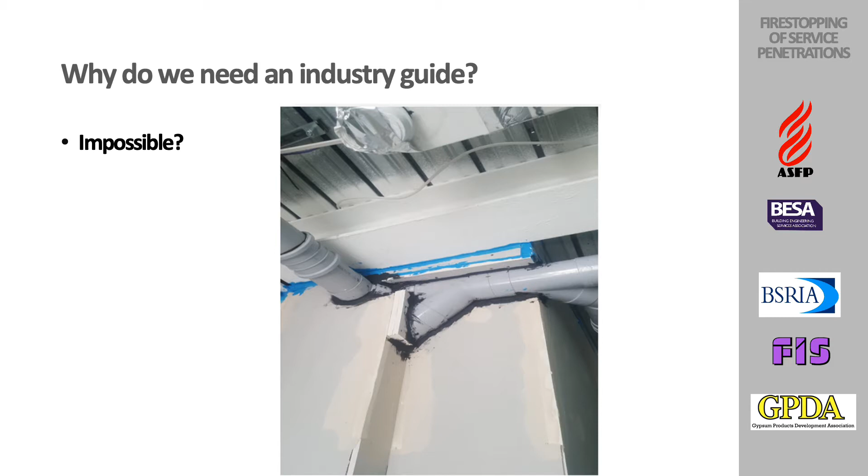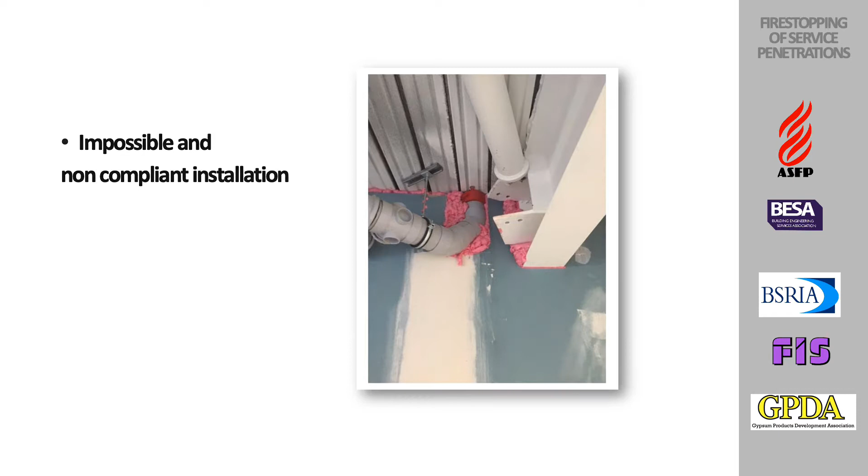I'm going to talk to you about why we produced this guide, how we developed it, and I'm going to talk you through some of the key points from the guide. Why? Well, there are many examples of why we needed a guide. These slides clearly show bad installation, awful design, and no thought that's gone into the fire stopping of this. This is obviously wrong, but not all non-compliant fire stopping looks non-compliant.

Breaches in compartmentation contributed to the spread of smoke, fumes and the fire at Lakanal House, where 6 people lost their lives. The fire at Grenfell Tower and the subsequent report from Dame Judith Hackitt has made the industry look again at what it does. Dame Judith has seen this guide and said that the guide was an example of collaborative working. We think it's a good example of not waiting to be told what to do.

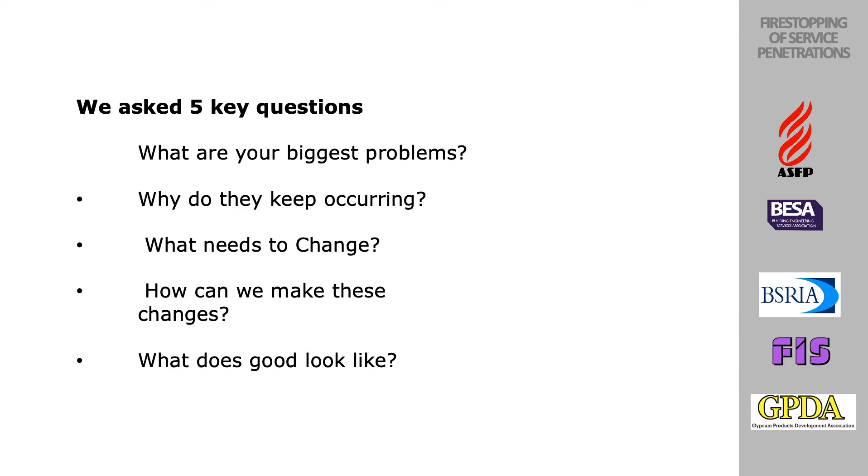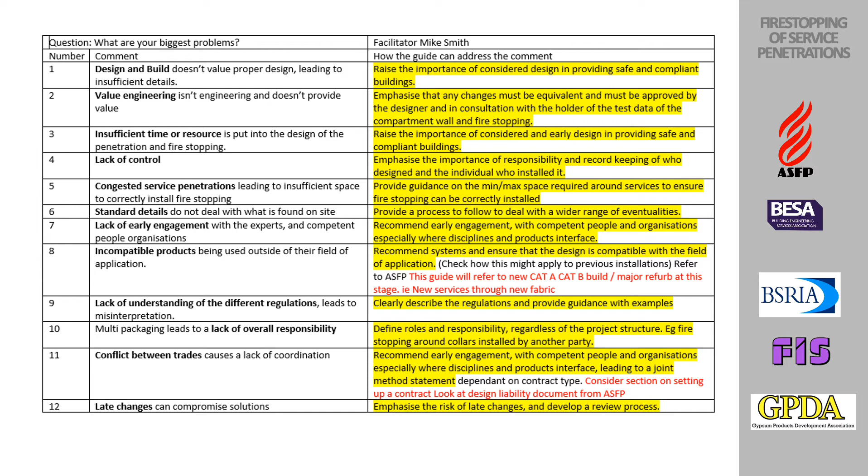We started by holding a workshop in November 2018. And we asked 5 key questions. What are your biggest problems? Why do they keep occurring? What needs to change? How can we make these changes? What does good look like? We summarized all of the answers that we got to these questions together and then looked at how we could answer those questions in a structured way in the guide itself. When we produced the guide and the drafts, each one went through a series of peer reviews to ensure there was rigor in the content.

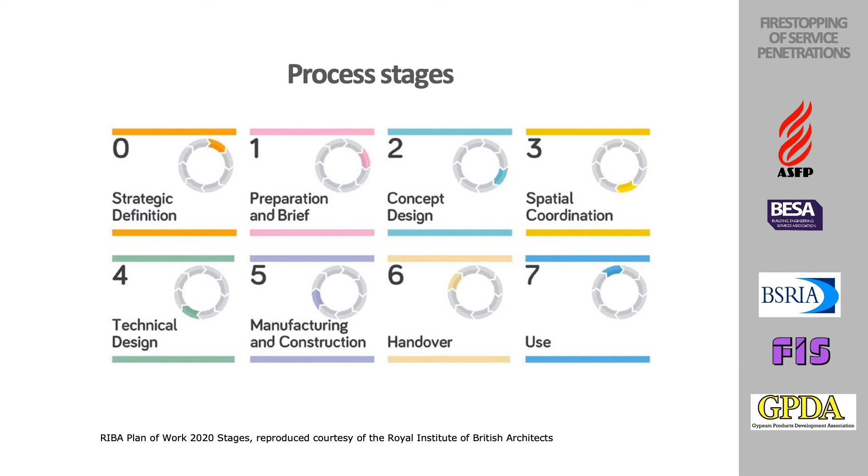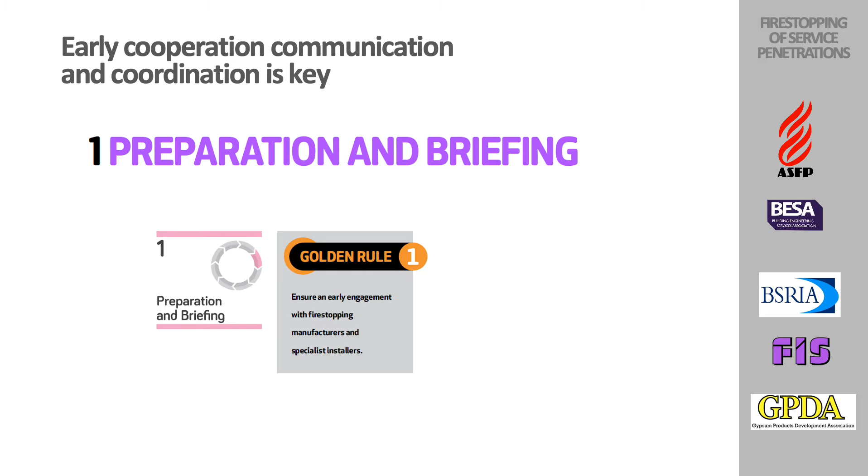We developed 9 golden rules, and I'll run through these as I go through the presentation. And importantly, where we could, we aligned them to the RIBA plan of work. So Golden Rule 1 is ensure an early engagement with fire stopping manufacturers and specialist installers, i.e. don't wait until there's a service opening that requires fire stopping to think about the fire stopping. Defining responsibility early is crucial. Collaboration is key to success.

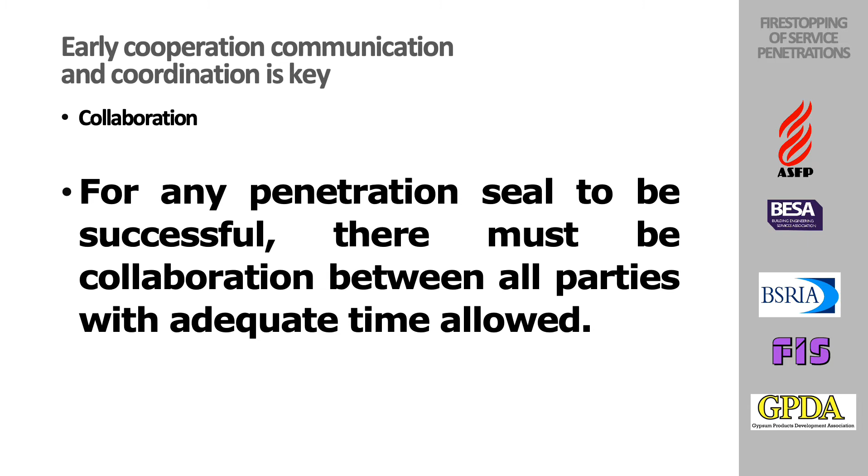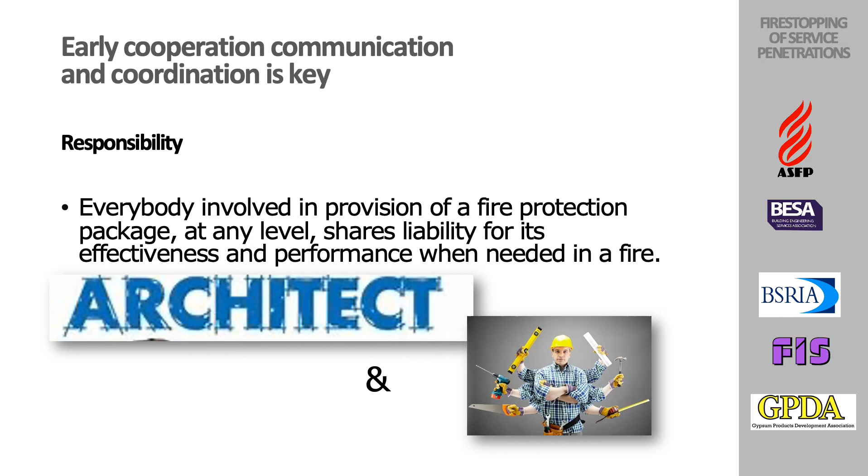Responsibility for the design sits with the designers, but can inadvertently be with the contractor without knowing that they've taken it on by putting forward alternatives without getting approval from the designer. Golden Rule 2, review the fire strategy documents and fire strategy plans in conjunction with the M&E specifications. Golden Rule 3, identify all of the service types passing through the compartment floor or wall, including any insulation products, and establish the space required to install the fire stopping around the services.

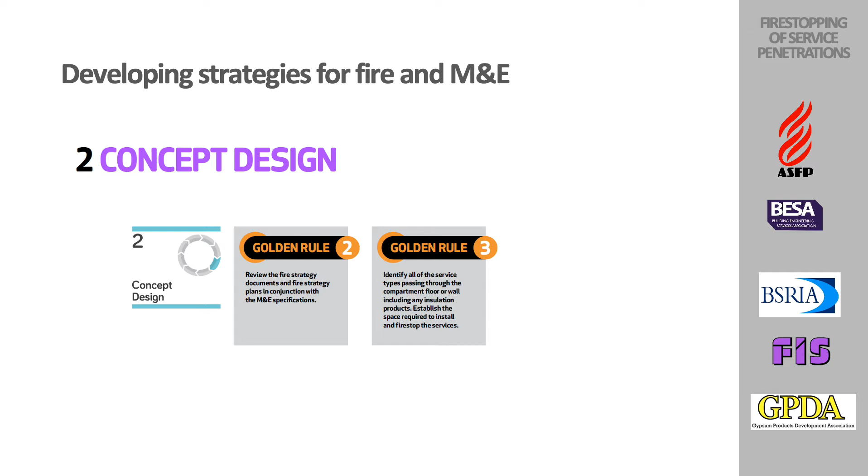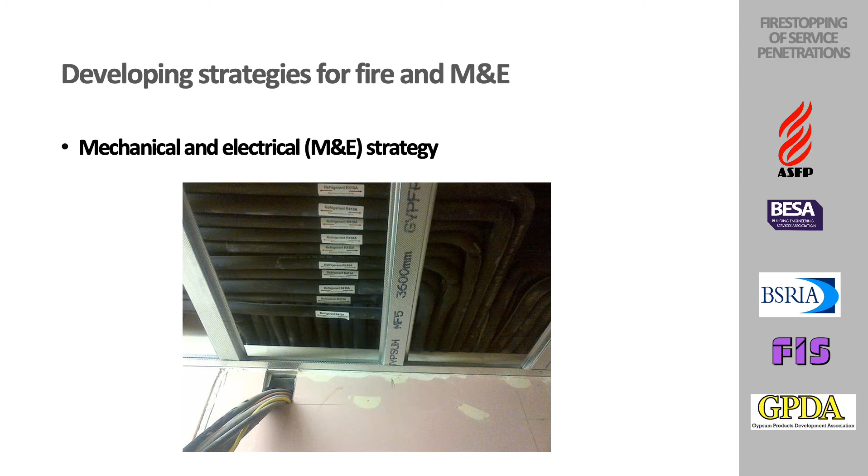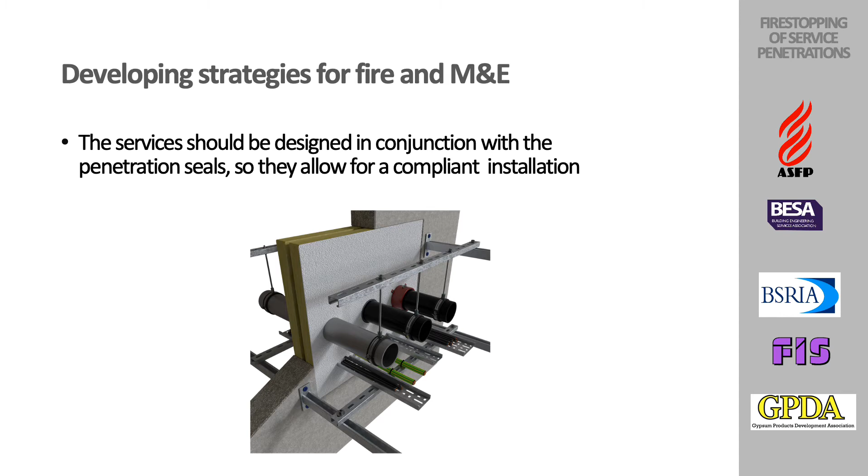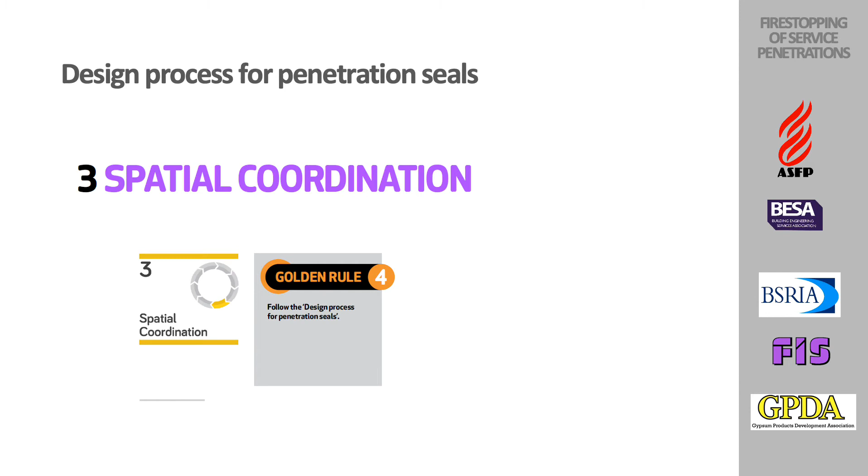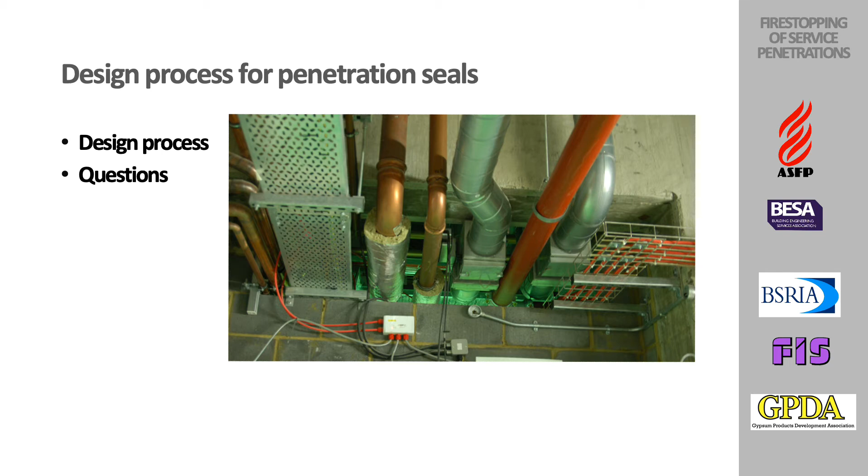3. Spatial coordination, and Golden Rule 4. Follow the design process for penetration seals. These are well designed and installed services, but it appears that no consideration has been made on how to achieve a compliant fire stopping because there's a mixture of ducts, pipes, cables and services in the same opening, and there's no approved fire stopping for these configurations. The guide contains 34 questions, 7 about the support, 3 about the aperture, and 24 about the service.

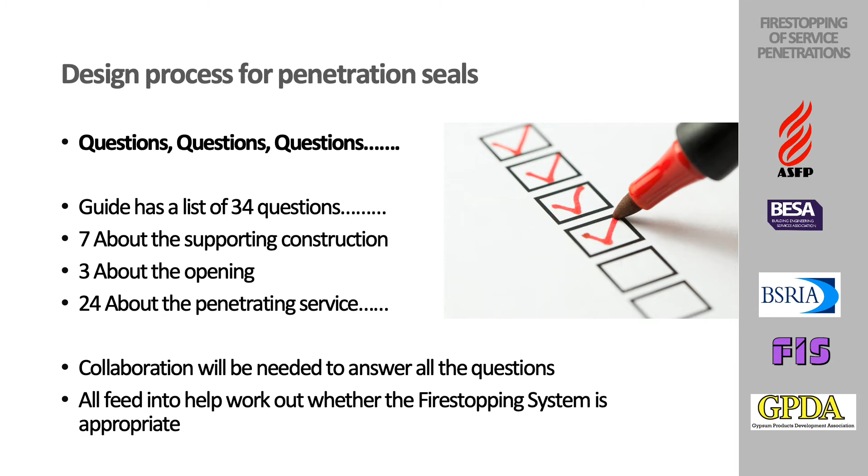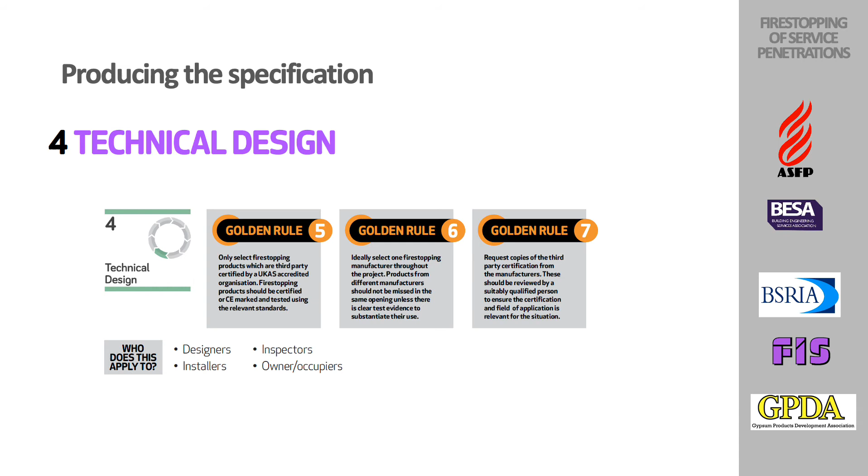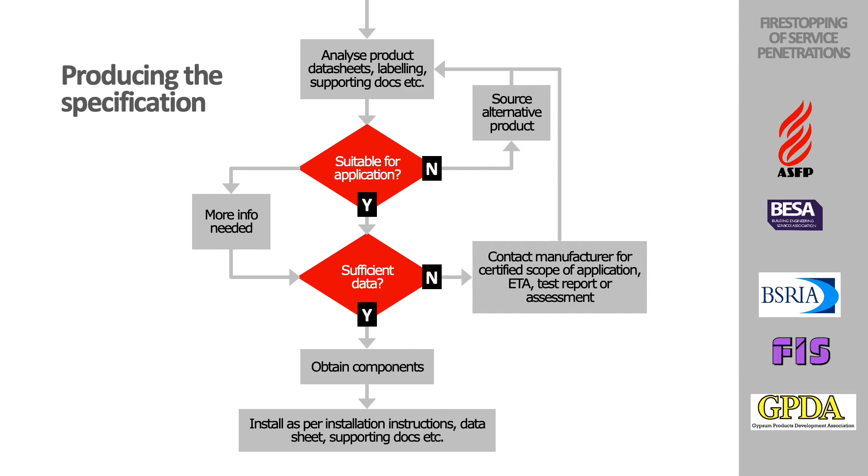4. Technical design. Golden Rule 5. Only use third-party certified products. Golden Rule 6. Ideally use one supplier throughout. Golden Rule 7. Ask for the evidence of compliancy. The guide contains an easy-to-understand flowchart to help select products. EN 1366 Part 3 Penetration Test. Note the supports within 500 mm of the test sample. This may impact how you design the supports to comply with the test evidence.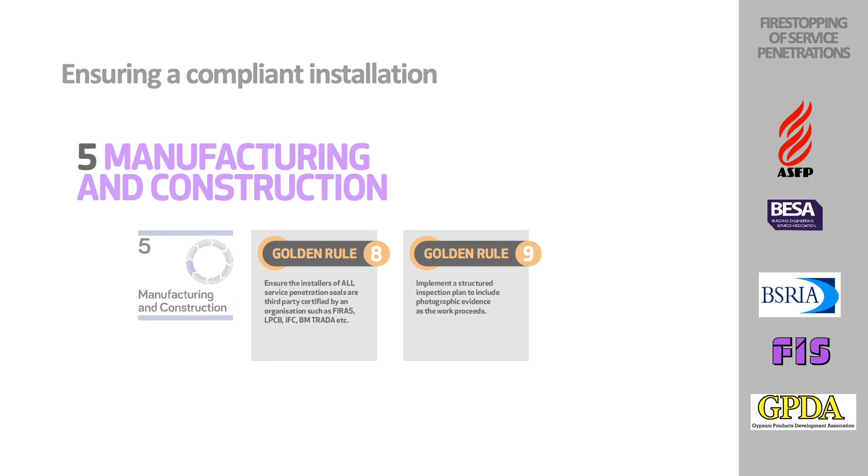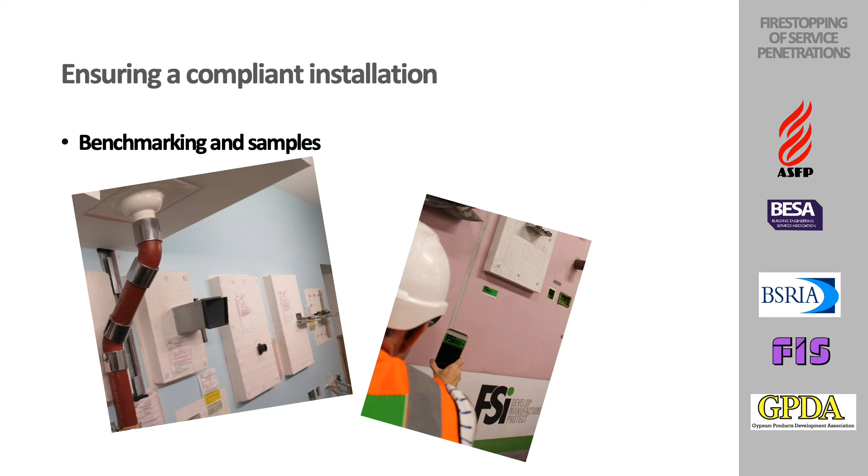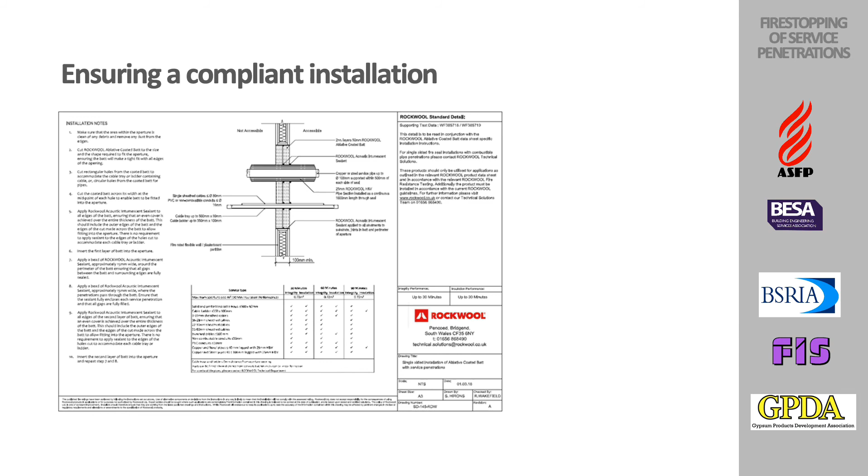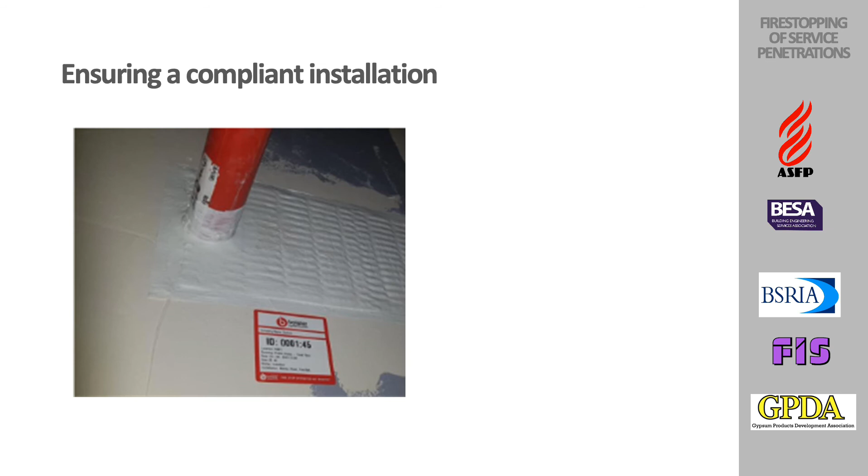Set up a sample area for benchmarking and toolbox talks. Look for evidence from the supplier on the correct construction details for the opening and installation of the fire stopping. Take site images of a completed fire stopping and file them as evidence. This is taken from the case study produced by NG Bailey on the University of Manchester project. The case study is included as an annex in the guide.

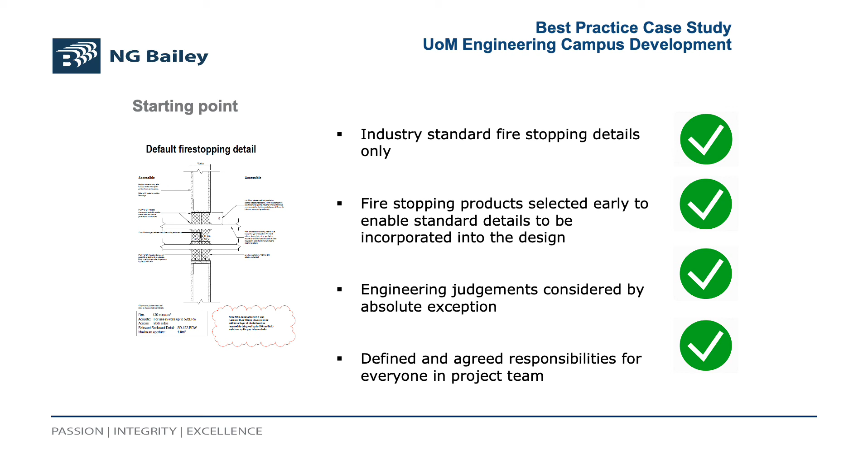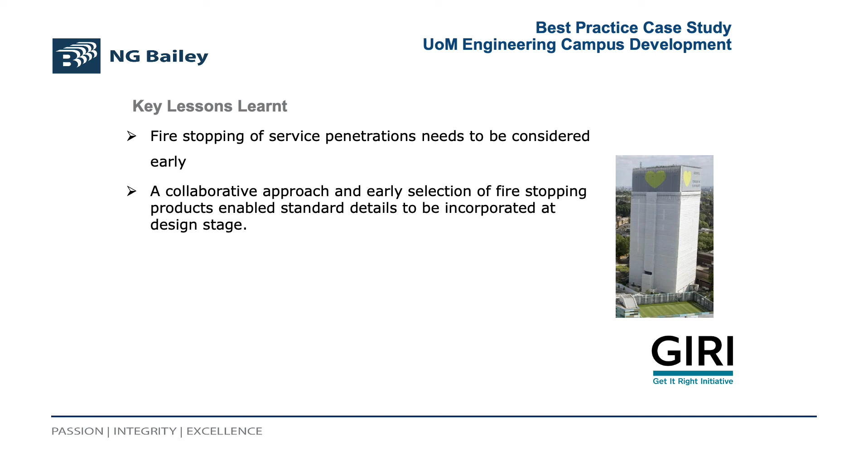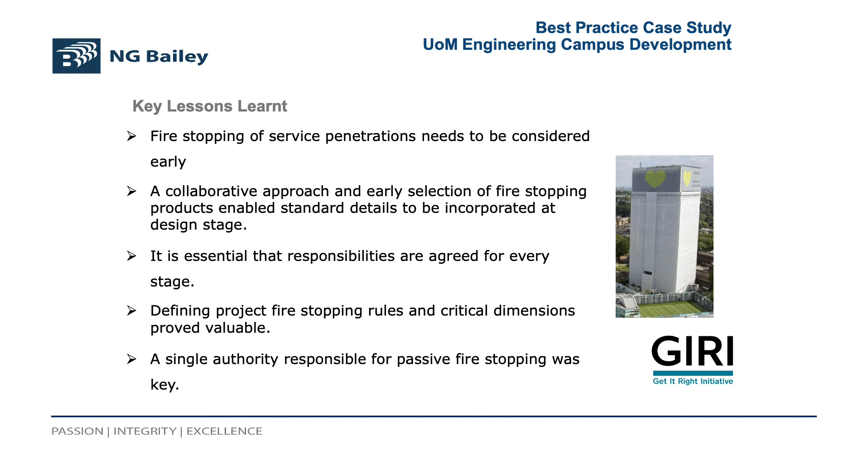If we summarise this, fire stopping of service penetrations need to be considered early. A collaborative approach and early selection of fire stopping products enables standard details to be incorporated at the design stage. It's essential that responsibilities are agreed for every stage. Defining project fire stopping rules and critical dimensions proved valuable in this case, and a single authority responsible for passive fire stopping was key. Our next stages will be to produce specific training alongside this guide that we hope to publish sometime next year.